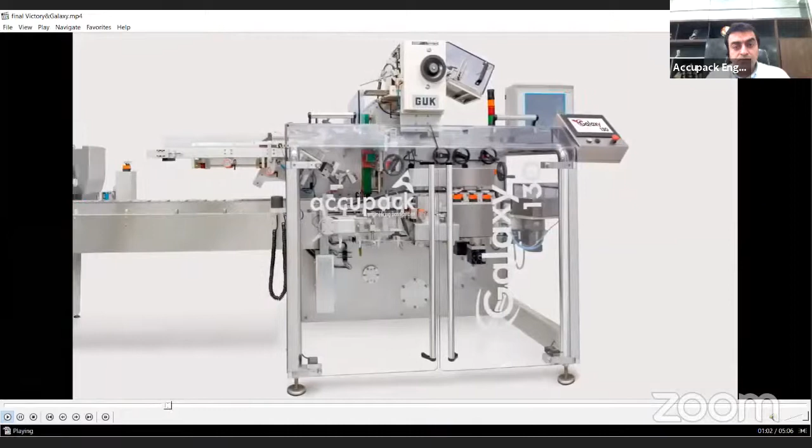Introducing Victory and Galaxy, the perfect high-speed packing line. For the first time, machines designed with design in mind. Now, with the elegant smooth lines of Victory and Galaxy, the details of design are visible—not just in memorable, classy appearance, but also in 30 to 40% more output that creates the ultimate difference.

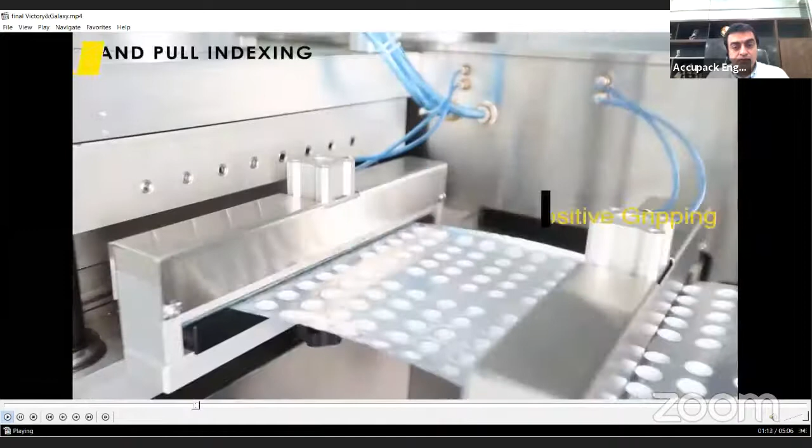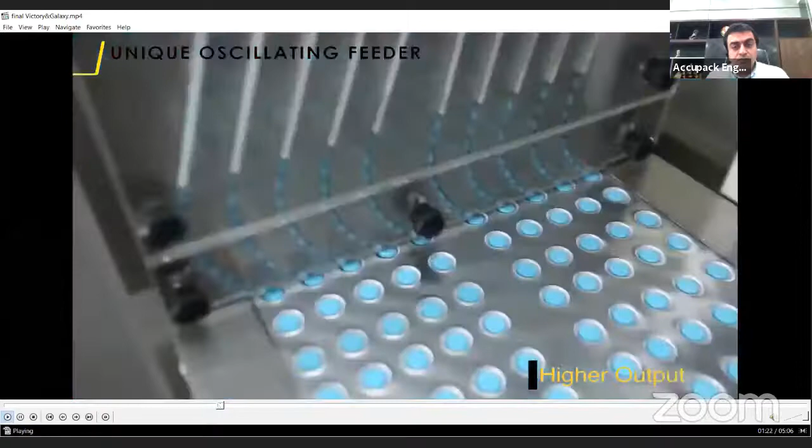Larger format area at high speed is what you've always wanted, for we know that speed and hassle-free mechanism is what you have been craving for. Its unique oscillating feeder enables a wide range of products at high feeding rate. A true advancement in engineering, an easy-to-use machine for all, integrates any visual inspection system to ensure perfect product quality.

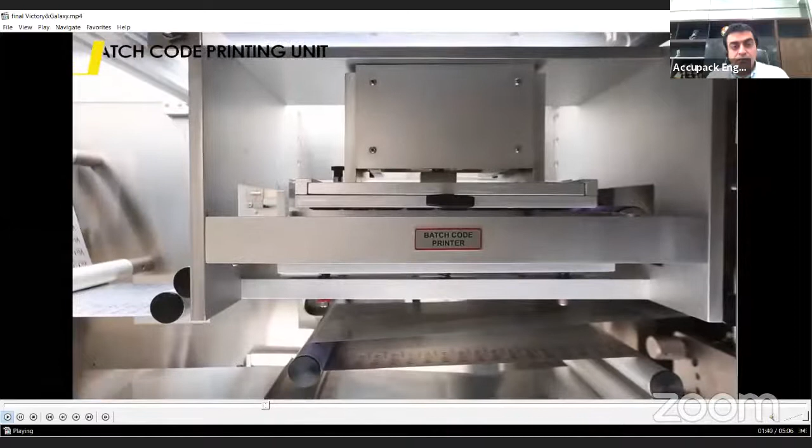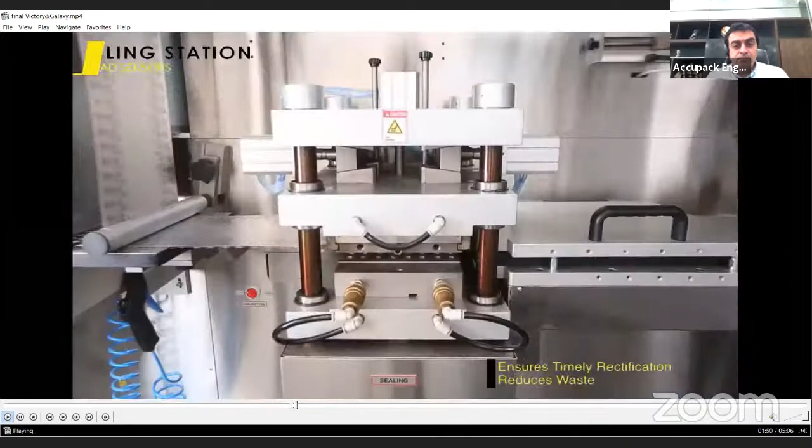Victory comes with unique print registration control, equipped with stretching mechanism that ensures no half-moon blisters. Victory's sealing station ensures overload protection. For the first time ever, a machine conceptualized with one word in mind: efficiency.

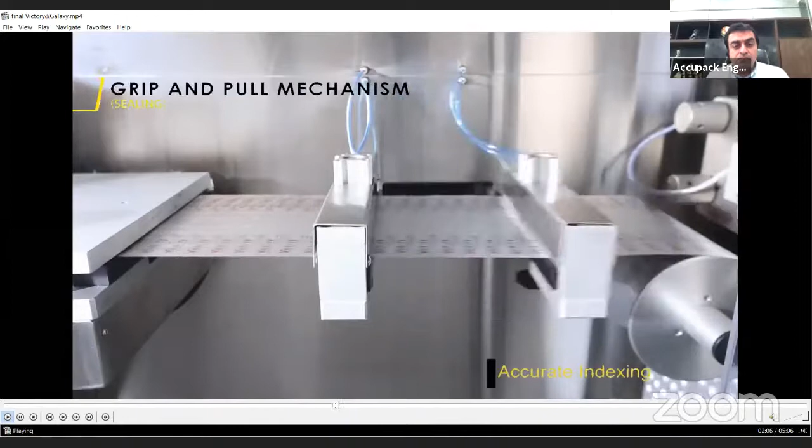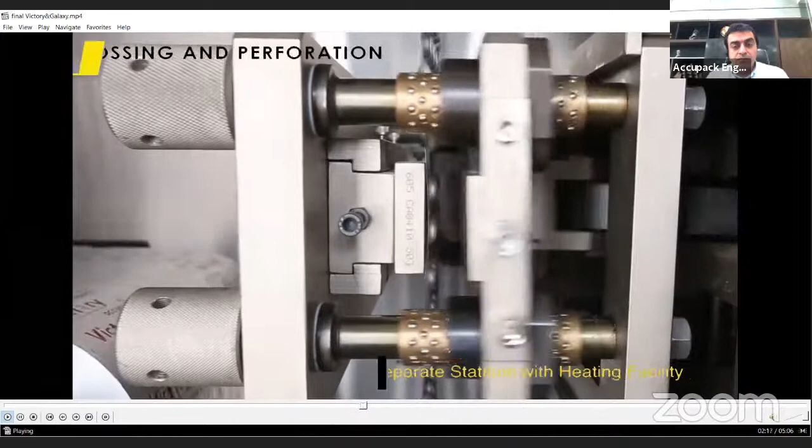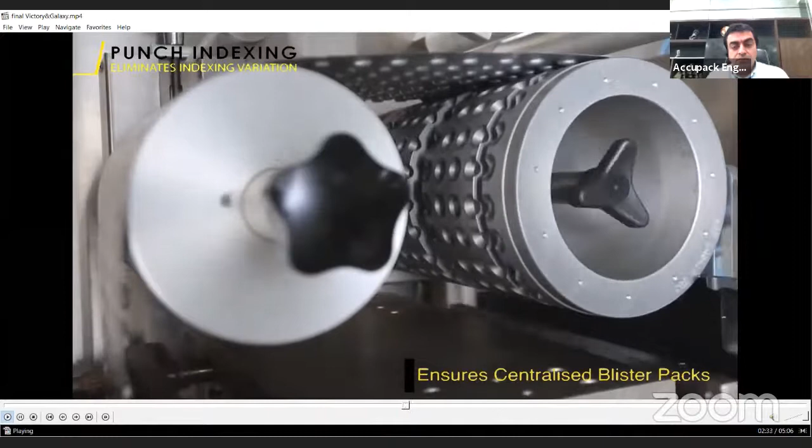For better impression and quicker setting, Victory comes equipped with separate stations for embossing and perforation. To give you the desired speed with accuracy, we have designed a unique punch indexing mechanism which eliminates repetitive setting hassles.

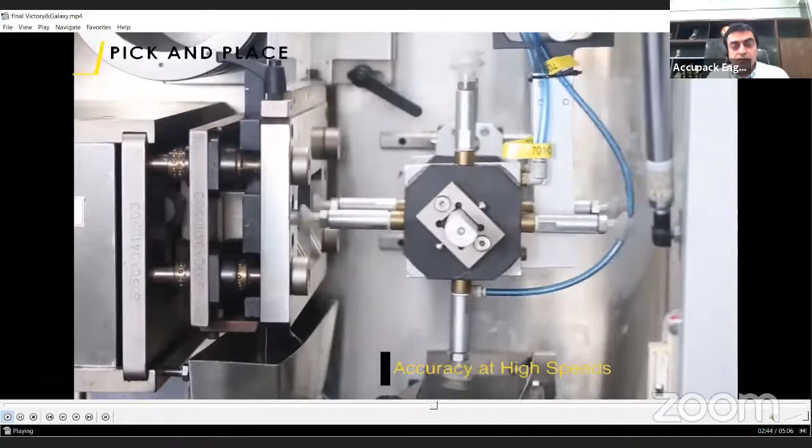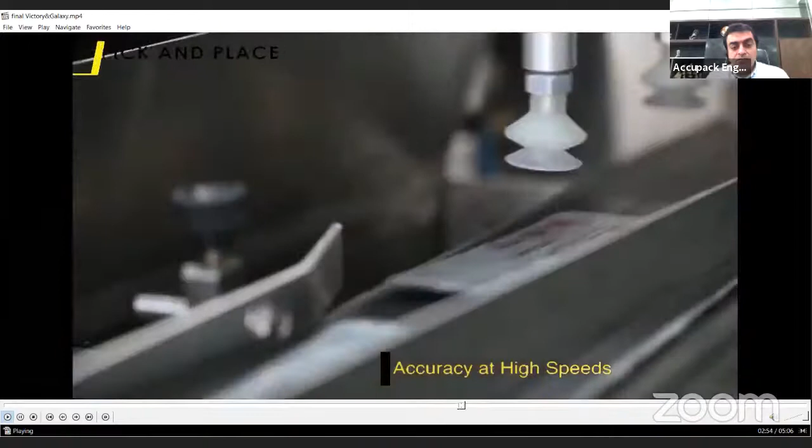With our 20 years of experience with the pharma industry, various machines and change parts, and our understanding of what your packing department actually needs, we have designed Victory with tool-free format changeover in 30 minutes. Designed in Europe, Victory provides the highest operator comfort and fastest product-to-product time. It's no surprise that Victory delivers 400 blisters per minute consistently.

Victory, with elegant ease, aligns with Galaxy to give you that perfect line machine. First of its kind, Galaxy is designed with servo-driven technology, with 3 rotary pickup arms ensuring positive carton opening at high speeds. We have designed the Galaxy ensuring no friction to cartons while in movement.

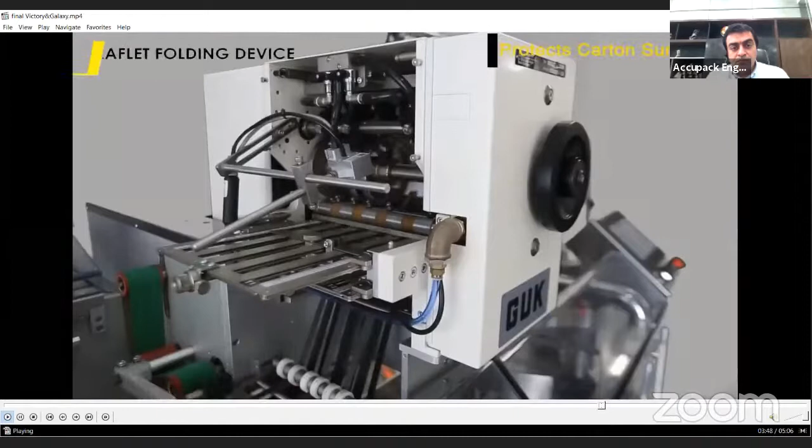It is compatible with pre-folded as well as online leaflet folding units. An operator's best friend, Galaxy ensures their comfort at every level and gives complete access to them with ease. Not just in ease of use, Galaxy is also a completely maintenance-free machine.

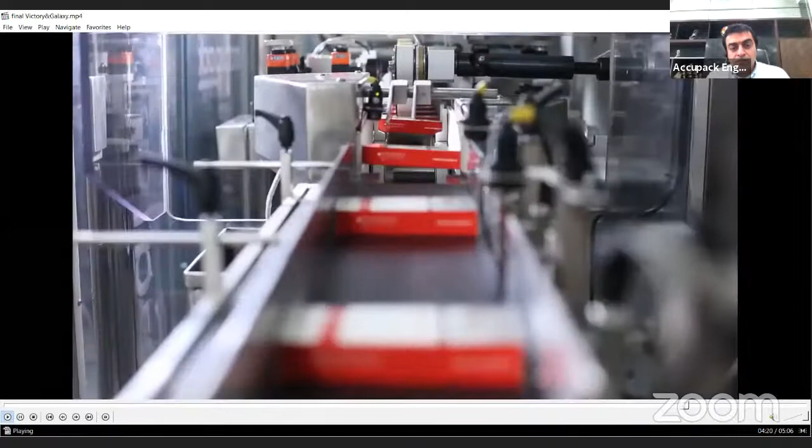Imagine an easier life with more output and better experience. You define the possibilities and we will redefine what a machine can do. Accupack, Victory and Galaxy—not just machines, but your partners in generating product output that matches your business goals.

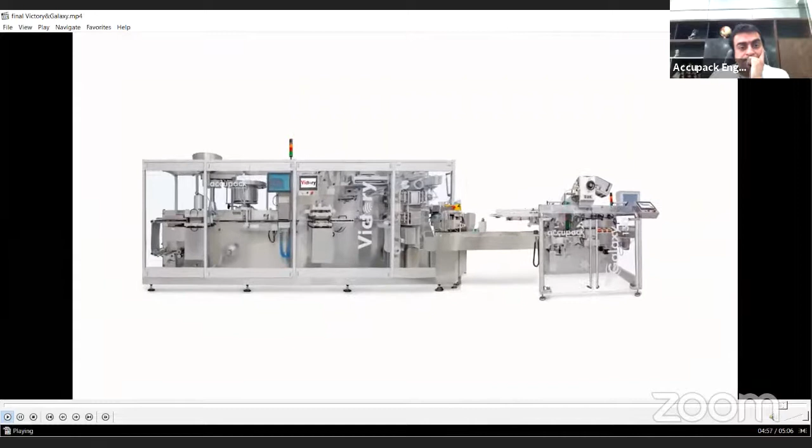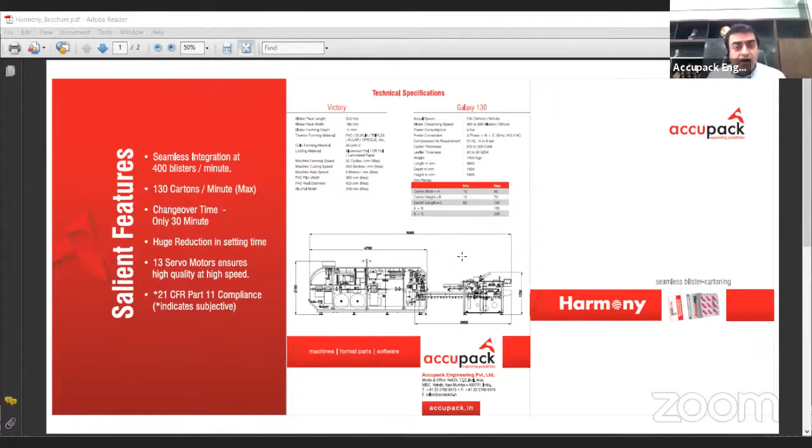The line which we now call Harmony was shot a couple of years back. The design at that time was squarish, and later we enrolled and started working with an engineering institute called IIT in India, and we changed the shape of the machine to suit your requirements. So now Harmony looks exactly how you can see on your screens.

The shape is made much more curvy because we got feedback from customers that in places where tablets are not coated, the powder gets settled in sharp corners, which becomes a bit difficult. So we made the corners with radius so that no powder particles can get settled there. As explained in the video, it's a state-of-the-art blister cartoning line with 400 blisters per minute.

What we focus on basically is operational efficiency. Whenever we buy a packing line, we are looking at a particular output in an 8-hour shift. Normally it's seen that if it was planned at 1.5 million tablets, it gives you 0.8 or 0.9 or maybe 1 million. What we are focusing on is 85% operational efficiency.

When we say that, it constitutes all the setting parameters, and any stoppages that come in between, like reel holder changing or any other errors because of which the machine gets stopped. Considering all these things, we are able to commit 85% plus operational efficiency in a shift. So if you're planning 1.5 million or 1 million tablets, you can look at an actual output of 85% of that. Why do we say that?

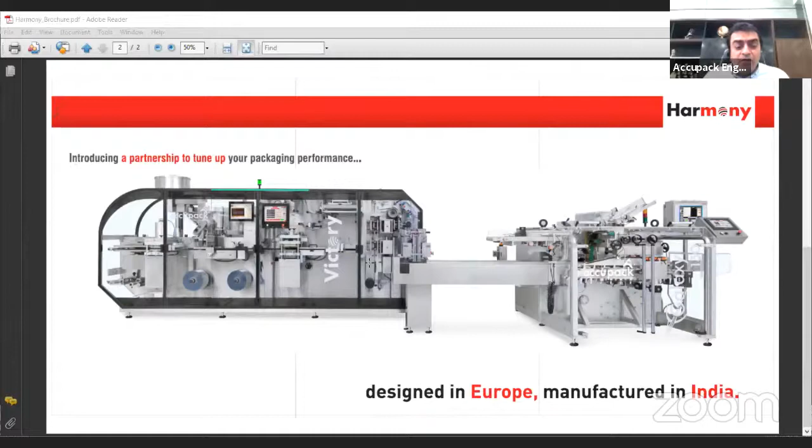To go into details, I'm zooming the screen a little bit so I can explain. Here, the machine has two reel holders, a splice table and splicing unit to ensure that whenever one reel is over, we can just connect the two films to each other without any wastage of time.

Then we have very nice heating platens, built to ensure that the thermoforming is heated properly. We have a very large format area. The format area of this machine is 260 millimeters wide and advances 180 millimeters. This enables you to fit in a lot of different combinations of tablets and blisters and give you 400 output.

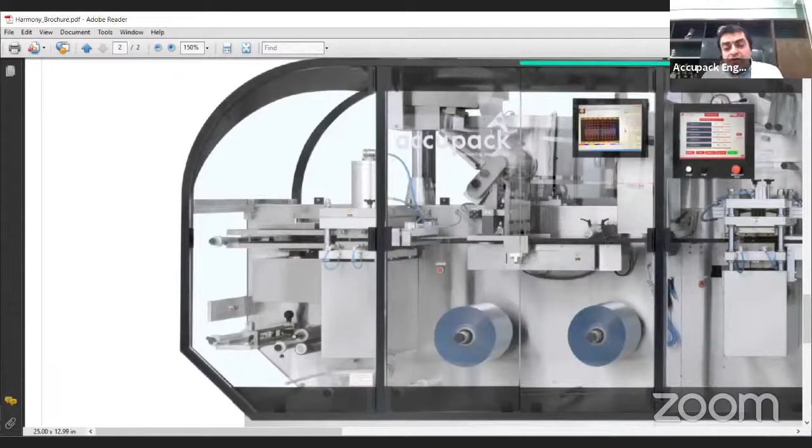This ensures that whenever you have a product missing in the web, it does not allow it to go into the sealing station. It stops the machine there. After that, we have cameras which check in case any product is not filled.

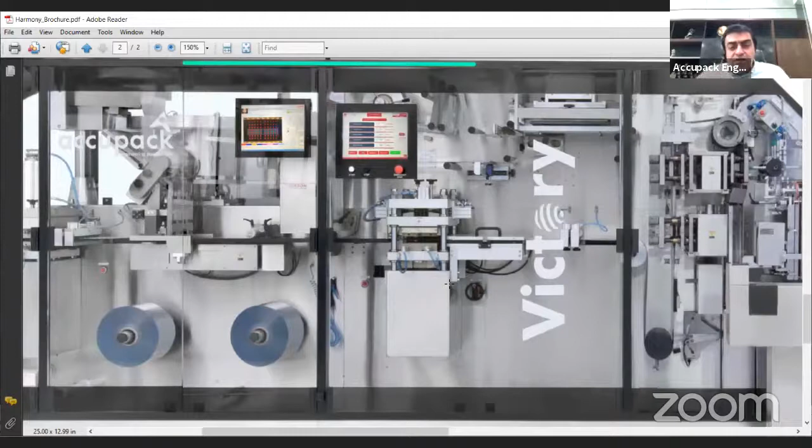Then we have the sealing station where we have overload sensors. Just in case any tablet has jumped out of the pocket during the camera inspection area or after that, before sealing, the overload sensors alarm the machine and it stops itself. Because nowadays, if the blister and cartoning line are connected, there is no possibility to catch a tablet that has jumped out of the pocket and gotten sealed, and the bad product can go to the market. So in Accupack's blister packing line, we ensure this is stopped and rejected instead of taking bad blisters to the market.

We have printing units over the top. We can also have inkjet printing there. And then we have a separate embossing station, separate perforation station, and separate cutting station.

One advantage I'd like to mention is we have automatic indexing. When there is a blister in your hand and we want to maintain the centralization with equal margins on both sides, normally in conventional blister machines, the operator has to adjust settings for front and back, which takes almost 30-40 minutes of setting time. In Accupack's blister machine, we have made this automatic. The moment you pass your web through after sealing, it automatically adjusts the center of the blister so you don't get offset blisters.

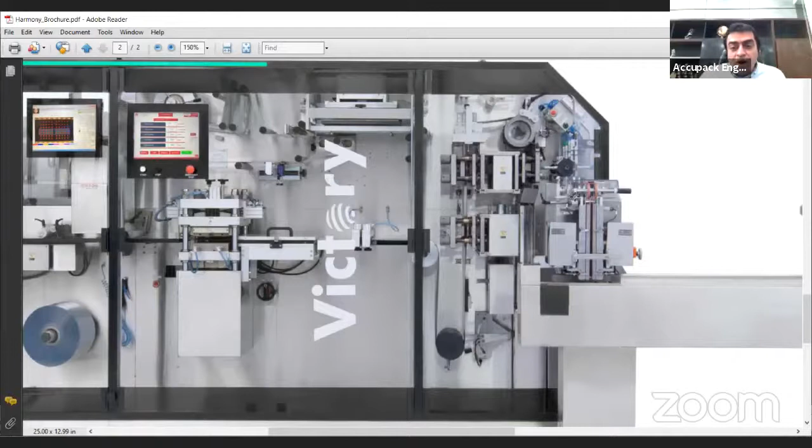After that, we have a cutting tool. We have rejection bins, a separate trim bin, a separate rejection bin, and then we have an overdrive which gets the good blisters to the magazine to go ahead into the cartoning.

We have the dropping done with the help of 4 servo motors. These servo motors enable correct and accurate dropping of the blisters into the bucket conveyor. It can be 1 blister, 2 blisters, 3 blisters, 5 blisters as per the program.

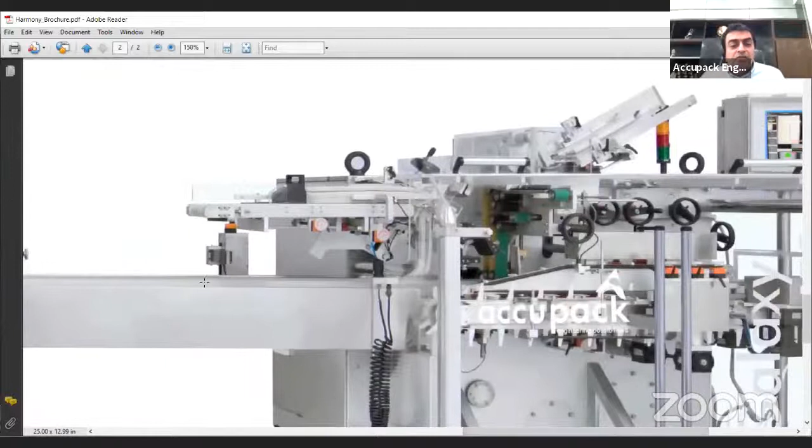Later, in the cartoning machine, we have sensors which check the height of the blisters, and if there is any error in counting or dropping, it rejects it. And if there are no blisters, there is no carton and no leaflet.

As you saw in the video, we have a very unique way of picking up the cartons. We do positive opening, which helps open the cartons in a positive way and drop them onto the machine, unlike normal carton opening.

The best advantage of this cartoning machine is that the pushing is from the back. This means the moment you open these two doors, you can access the machine in a very detailed way. And there is no friction to the cartons. Overall, it's a beautiful machine, and the cartoning machine is very compact.

What we are able to offer you is a line machine which will enable you to get 400 blisters per minute on a constant basis.

As I mentioned, designed in Europe, manufactured in India. We are able to give service from India, and we have service engineers across the globe.